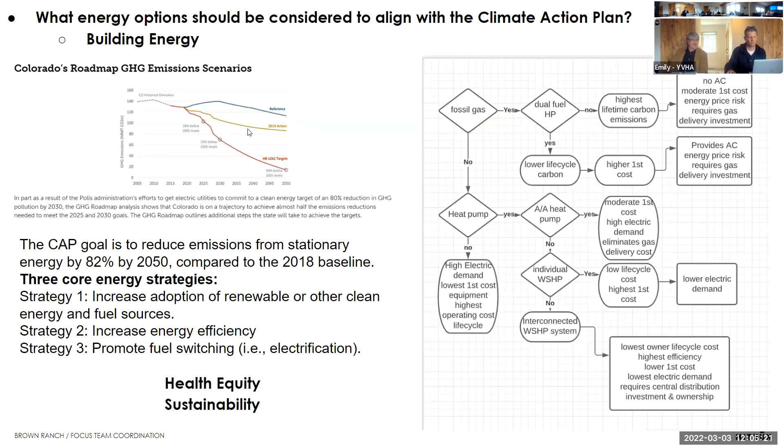Dylan Anderson with the Steamboat Today. I'm Jason Beasley with the Housing Authority. I'm Brooks Kellogg, also an interested resident, I've been building here since 1972. Can our online folks unmute and just say a quick hello? Mike Morty with Routt County Road and Bridge. Thanks, John Mike. Snyder with Steamboat Springs Public Works. John Spezia, citizen at large or small. Welcome, John. Jai Carroll here with City of Steamboat Springs Public Works. Tim Sullivan with Yampa Valley Sustainability Council.

Virginia, do you want to just say a quick hello and who you are, introduce yourself? Virginia Herman with YVEA. Hi.

One bit of housekeeping before we get to Paul. We all saw that article in the paper the other day, and I had dinner with a friend last night who asked what's going on with the comment that YVEA can only provide 15 more houses to people in the county. I said that's not quite the whole story, and we're working on cleaning it up. I want to give Virginia a minute to clear that up. All of these teams and our community outreach regarding these sessions want to make sure we're as accurate as we can be, and not affect businesses and other people in a negative way. We're all trying to give the best information we can, but sometimes we make assumptions and put the cart ahead of the horse. We want to minimize impacts on our community members or businesses. So I want to give Virginia a minute before Paul gets going, because none of what we say about water or storm drainage happens without everything else happening too. Virginia, if you want a second.

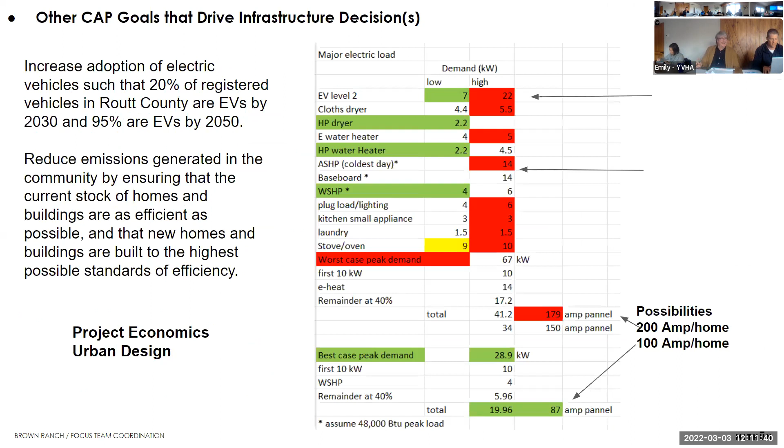That was a great tee-up question: what energy options should be considered for Brown Ranch? Again, as I did last week, here's a little decision tree to help keep it in focus. You really have two choices: 100% grid-tied, which we'll call the business-as-usual or traditional system.

That's where we heard last week how much load can be served from the new substation or an upgrade to the existing substation at the airport. If the load gets too big for that existing substation, there'll be another cost point to go further back in the system to where that substation gets its electricity from Xcel. So that was pretty much what we heard last time.

What we'll need to fine tune is—YVEA, and I used to be a utility planner—they can't size a system until we tell them what the load is. Once we dial in the load, they can sharpen their pencil and say, okay, we don't need to upgrade past the substation, or we do, and here's how much it'll cost to get from the substation to Brown Ranch.

And then the last piece is, once you get to Brown Ranch with the primary service, you still have to get power to each building, so there's a cost point for that infrastructure. We're way too early in the conversation for that, but I think we should frame our discussion on how much power we're going to use, how much it's going to cost to get there with or without the need to upgrade the feeder to this new substation, and then what it's going to cost to distribute that power once the urban group has given their densities, linear footages, and KWs per home.

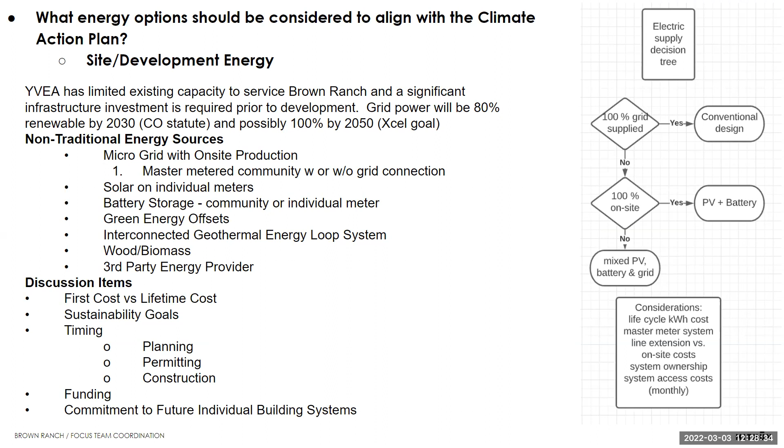So what Paul and Ryan have been talking about is kind of laying the framework for us to explore a couple different options to say what is the best scenario for us, short-term, long-term, bringing in these factors we talk about, and wanting to make sure that we fully explore both of these options to see what's best for the affordability of the community long-term and resiliency of the community long-term.

So there's probably not an easy binary answer, right? Like we get down to the end of this, it's gonna be like, you're right, this is the solution, we know it. I think it's going to take iterations of us exploring this, figuring out costs.

And so that's what all of these teams are driving for, getting us to a point where we understand what different options we need to start weighing on, as opposed to starting out with everything on the table. We now understand that we have maybe 2 or 3 options related to producing energy for this site, and now we can spend time really digging into that.

Well, just to step back to last week, and correct me if I missed something, Virginia, but the upgrade to the airport substation gets you to about 40 megawatts. Above that, then we have to go back to the connection with Xcel, which is an additional cost.

So I think one of the reasons the hybrid approach is still on the table is that we might try to stretch that 40 megawatts out as far as possible. Can some of these other things we're talking about help us? And the piece we're missing right now is the demand, right?

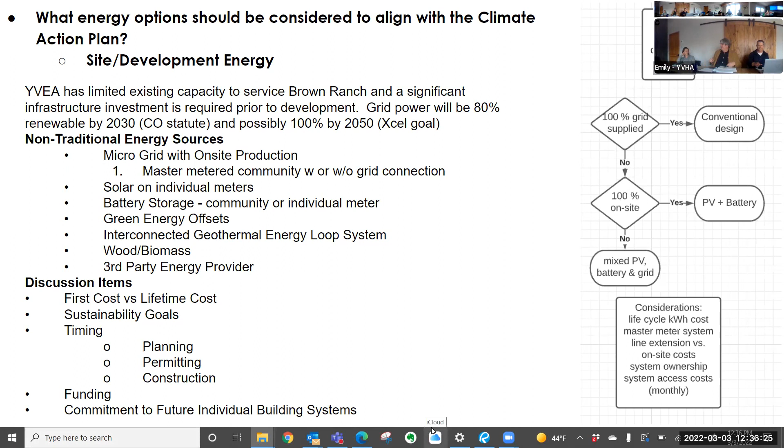So let's go from the technical to the fun. The other thing I was asked to do for this presentation, if you want to flip a slide on me. So there we go. So what precedent projects could be considered as a model for Brown Ranch?

This is Whisper Valley, Texas. Slightly different climate, not quite as cold, but definitely hotter. So just kind of flip the demand. They have to have a lot of air conditioning load, we have to have a lot of heating load.

This is a planned 7,500 units, it's under construction and units have been occupied now. 7,500 single family, multifamily housings in a planned community. It's a developer-based community, so it's not like this where a housing authority is putting it in.

They did go with what they call the geogrid, so those homes and commercial office spaces are all connected with a common water loop. And they're figuring 70% reduction in energy consumption by doing that from what they would have had with a traditional heat pump system for heating and air conditioning.

And those systems actually are what we call triple function units. So the heat pump provides space heating, space cooling, and domestic hot water. And then all of that goes into a common loop.

They went with all Energy Star appliances. They've given people the option to put solar on their individual roofs, so they're what we call solar ready, where the conduits are in place, the developer's not putting solar on the roofs. They call it an energy monitoring system, so folks can see where their energy use is going and maybe take active measures. But I would say for our purposes, that could become an energy management system.

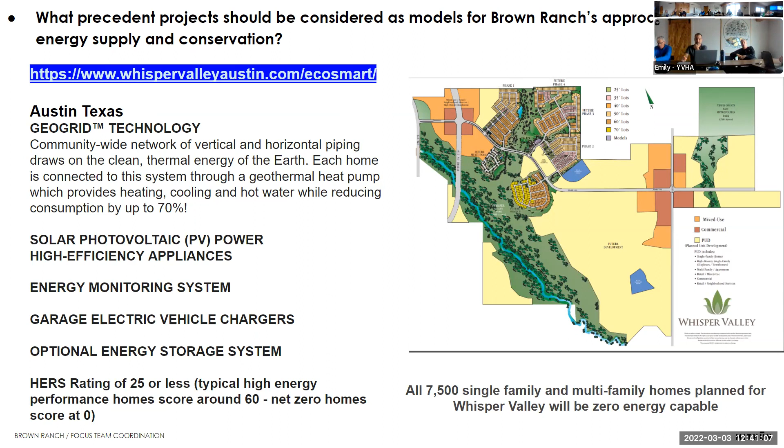When we were debating the various sources for putting up the tower and the generation, we made it such that if anything ever went wrong in a lifetime, the company would replace it—a good thing, because we lost the generator and they had to come in and replace it. But basically it saved the campus $500,000 a year in energy costs, and it went completely self-contained on their total campus energy without doing anything else but just putting in 2 wind farms.

We don't get enough wind here. No, we don't. So I'm not sure it's worth looking into that here.

If you're going to do an interconnected thermal system, there's what we call joint trenching opportunities, where you dig one trench and put 2 services in, so you only have to pay the excavating cost once, and you can leverage that first cost between multiple services.

And then, as I mentioned earlier, we really need to be granular on what it costs to get power to Brown Ranch, and then what it costs to distribute power throughout Brown Ranch. So I break that into delivery versus the development distribution. And then, as we just mentioned, we still got a lot of work to do.

If we can't get to where we need to go, and where YVEA needs us to be, till we know the building types—both residential and commercial, because commercial is going to eat into that 40 megawatt load as well—that's why efficiency has become pretty important. Once you know you've got a cap, how can you come in under that cap? And then what's the timing?

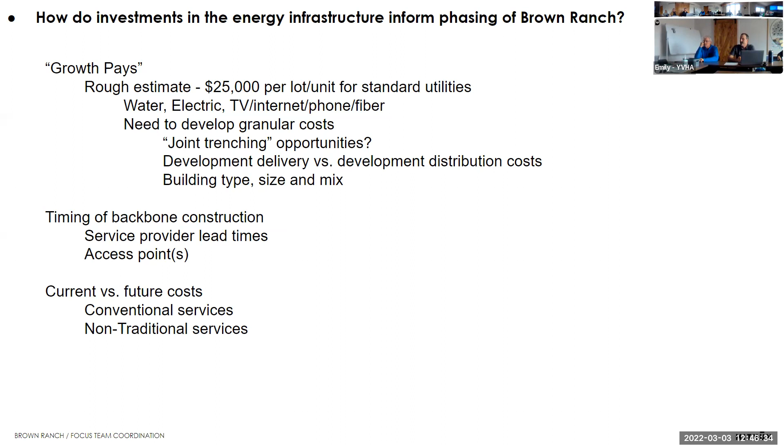Ryan, do you want to go into stormwater, please? Stormwater is a little bit more straightforward. It goes downhill, right? Yes, hopefully. Or into your basement. Or you're using a pump.

I think we can push some of the heavy lifting up to some of the other groups, especially the urban design group. That'll be nice while we focus on the review.

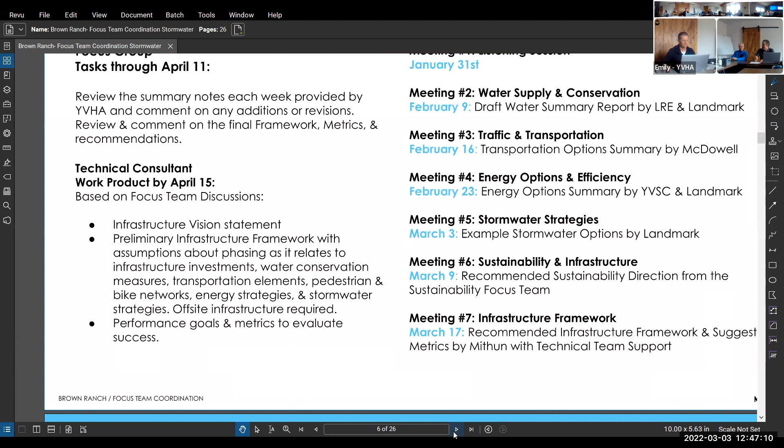Right, before you start, there's certain city regulations, we can't just go off and do our own thing here. You're going to have to follow some fairly strict guidelines. Is that accurate? Yep, so I'm assuming this parcel would be annexed into the city, and we'd have to conform to the city's regulations. But above and beyond that, there's also Colorado state law and Routt County regulations, which would require a lot of the same things the city would.

When you say state, are you talking water quality and water rights issues? More water quality and conveyance issues. Essentially the way the state law reads, you have the right without an easement to discharge stormwater onto a downstream property at the existing rate, the historic rate. So when you come in and pave a whole site, you can't just let all that water run off onto your neighbor's property. We'll get into that a little bit more.

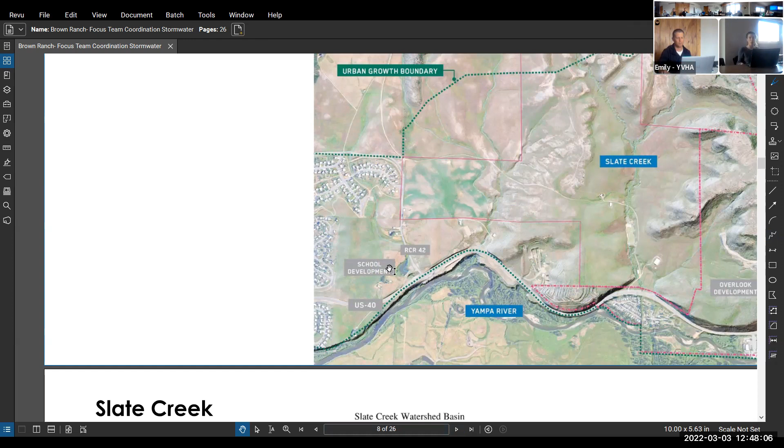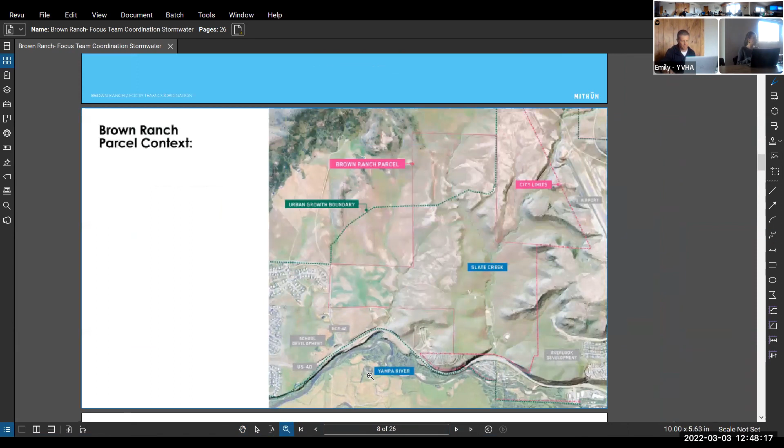So first, I'll try and run through these, we have about 40 minutes. Just to orient everyone, we're talking Brown Ranch here. Slate Creek is the major drainage way that runs through the spine of the site. There's a secondary drainage way on the west side that I'm not really going to talk too much about today, but everything I talk about for Slate Creek applies to that same basin.

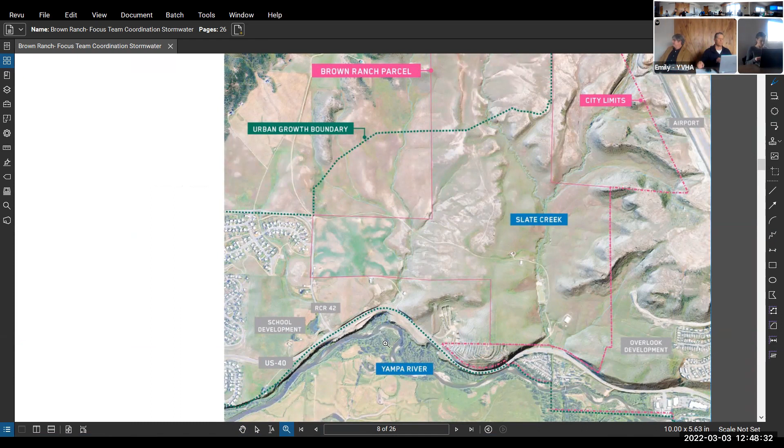It's about 3.36 square miles. It drains down through Brown Ranch. So when they looked at that, they calculated a 100-year flood flow of 155 cubic feet per second.

A 100-year flood flow is a flow that has a 1% chance of occurring in any given year. It's a little misleading the way the terminology works, but if you set up your tent or house out there for 100 years, you actually only have a 63% chance of seeing this flow. In any given year you have a 1% chance, and you could have it in multiple years - you could have a 100-year flow in 2 years throughout. The probability is highly unlikely, but possible.

So looking at that, what they determined as part of the Steamboat 700 project is largely that flow of 155 CFS was confined to the Slate Creek channel. There is some flooding down at the Highway 40 culvert that goes down between KOA and Sleepy Bear.

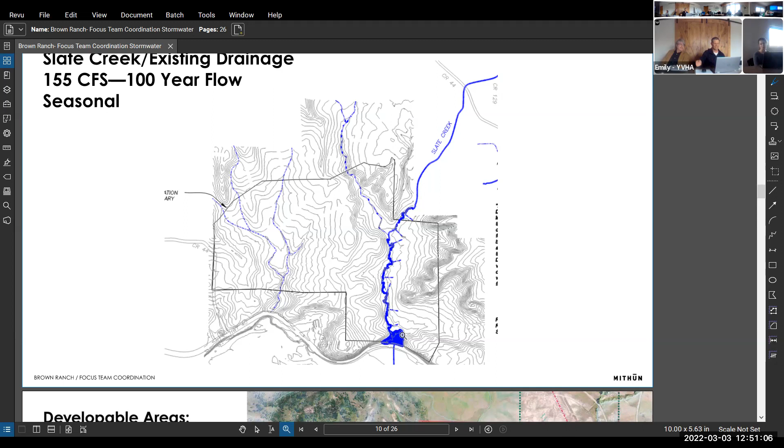Is there potential for the underpass for the core trail to include some sort of conduit? There isn't - I'll get to that in a minute. It's a good question.

So what happens? This is a slide from the urban design group. Right now the site is basically in 100% pervious condition. There's a few gravel roads out there, but for the most part, it's undeveloped.

The urban design group has started looking at how much of the site - 534 acres - the project could develop. They start to take out the portion that's outside the urban growth boundary, areas along the creek where the slopes are too steep, and they're left with 324 acres.

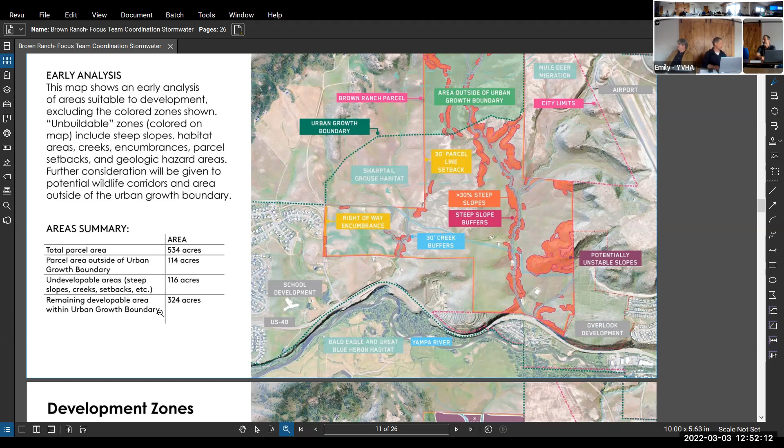Is that portion outside of the boundary truly - should it be taken out of the building calculations that we're making? That's one thing the urban design group's looking at. It seems like the border is just a random dot somewhere that it could be extended. But someone's looking at that, so that number could increase - that's just for this discussion.

And then they started to map out areas that could be developed. This is how you come up with 324 acres.

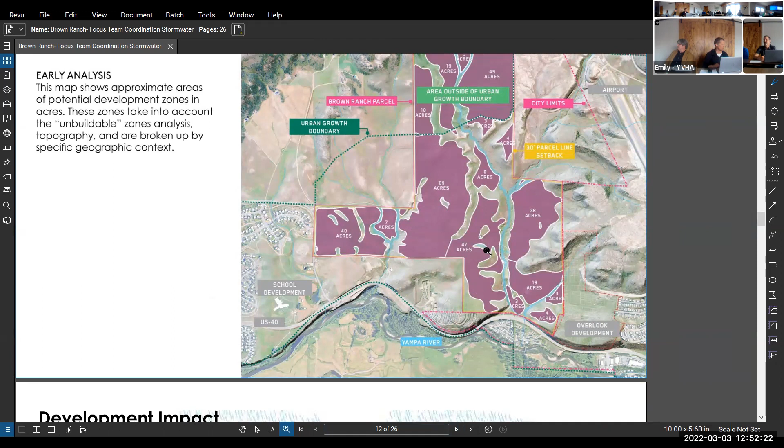So what happens when we go in and start developing all that? This slide is showing that in its natural state, about 5% of the water runs off and 95% soaks into the ground.

We go in, we start putting in roads, sidewalks, parking, buildings - all of a sudden we flip that equation. 95% starts to run off and 5% starts to infiltrate.

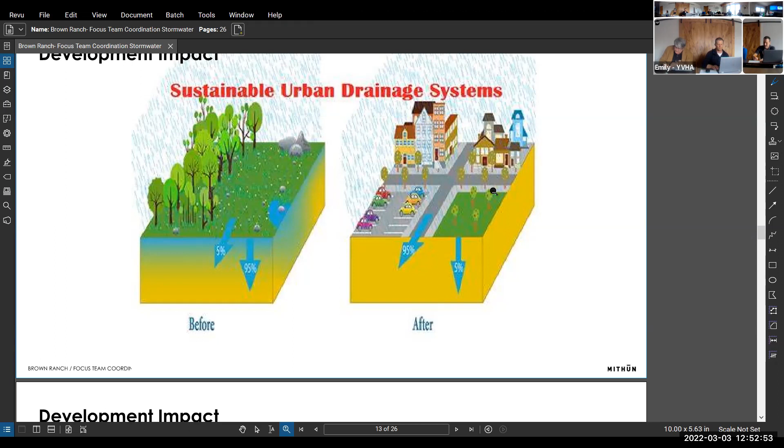This has a few different impacts. We increase the amount of runoff significantly, and we also decrease water quality as you start to develop, pave things, put buildings in. There's a lot of scoria right now as the best example - we spent all winter putting down scoria, and now it's all getting washed down into the road. So we have to deal with these impacts that development creates.

When we increase runoff, we have two choices. We can either increase conveyance capacity, meaning we put in more pipes, more inlets, enlarge channels, or we have to detain and limit flow to the existing release rate - that 155 CFS. That's a pond - it catches it, and then there's a controlled outlet that releases it at the historical rate.

And then for a decrease in water quality, we'll have to construct what are called permanent stormwater quality features. These are things that try to catch sediment, try to catch floatables like styrofoam - stuff that floats to the top, sediment goes to the bottom. And then there's also lots of chemicals in the runoff from our cars, fertilizer, ice melt, and the things we use in everyday life.

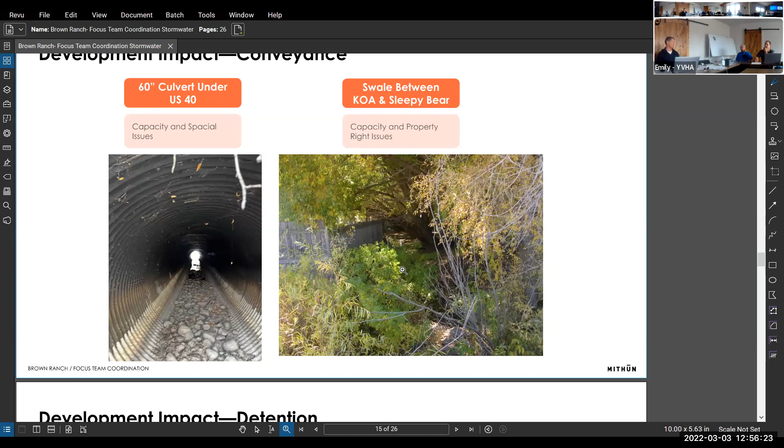So I think the Overlook project, Steamboat 700, and Steamboat West neighborhoods all came to the conclusion that conveyance is not the answer to handling the increasing runoff. And they start to look at detention.

So just running some quick calculations, if we assume that 330 acres are developed and we take the imperviousness from 5% to 75%, we start to look at some required detention volumes.

City code requires you to look at what's called the minor storm, so a 5-year storm, or a storm that has a 20% chance of happening, and then a 100-year storm. The detention required to handle that increase in runoff is 17 acre-feet for the minor storm, or 30 acre-feet for a 100-year storm. An acre-foot is...

...a body of water that's 1 acre in area and 1 foot deep. A football field is about an acre, so a football field a foot deep is probably a good visual of the volume of an acre.

You can see these cubic feet numbers are pretty large and hard to visualize, so that's why engineers tend to talk in acre-feet. It's important to be clear, it's not acres, it's a volume of water detained within a pond of so many acres at a certain depth. So if the water was only 1 foot deep, it would have to be 30 acres. If you had it 5 feet deep, then it would only be 6 acres.

The city of Steamboat Springs does require regional detention for new subdivisions, and the thought behind that is they want to try and minimize the number of detention ponds.

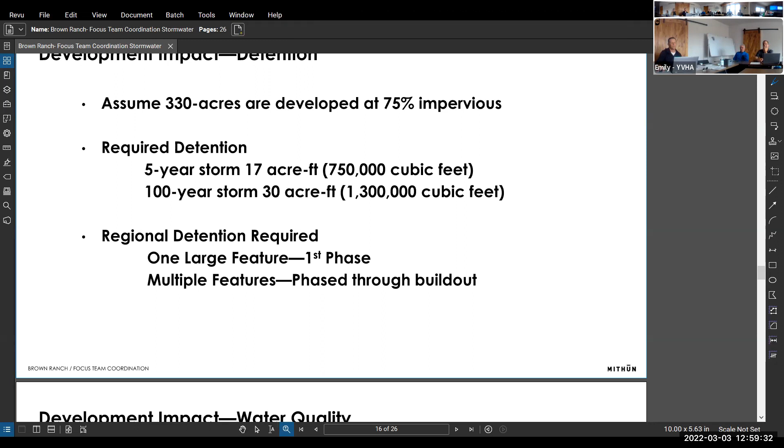Looking at water quality capture volume. So that's as we start to figure out how much water we would need to treat to collect and remove those pollutants. Some quick calculations say that has to be 9 acre feet, and that can be combined with detention. The city of Steamboat does allow you to do that. Some cities don't allow it and require it to be separate.

Ryan, what's the size of the ponds on this site? Good question, there's a stock pond out there. Yeah, that's a great question. Is that a 9 acre foot pond? Is it 8 acre, 12? I don't know, it's pretty big. It is, yeah. It's probably an acre at least.

So now I'm going to start to talk about some stormwater solutions. Number one solution: whatever you can do to reduce the runoff, just minimize the amount of water we have to deal with. The less impervious the site, the more pervious it is, the easier it's going to be for us to deal with all that.

Ryan, you can't actually stop it from raining. What you're talking about is reducing the rate of runoff, the total volume never changes. Well, the volume would change in these scenarios, for instance, if as part of the project people are going to walk more, we can get rid of half the cars, or cut the parking lot size in half. So you've increased pervious area, decreased impervious. More parks, less parking lots.

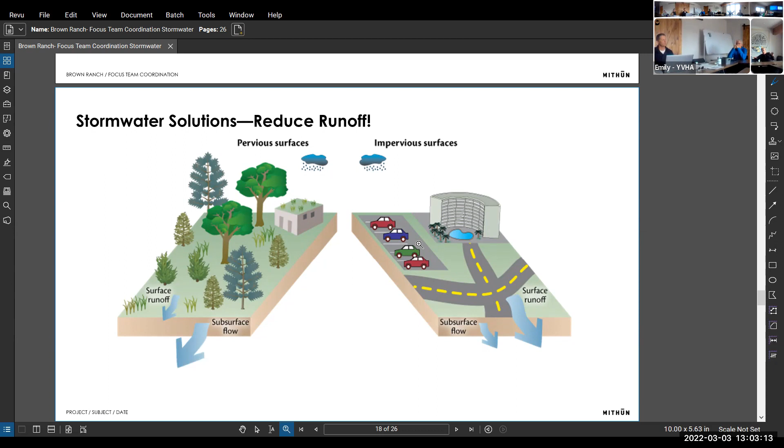If we created a larger wetlands, would that just subtract from your detention requirement? That's a good question, let me get back to that one. Okay.

The trade-off is that curb and gutter costs more because you have to put in concrete and storm sewer, but it's more compact and allows for denser development, which is why you see it downtown. The swale open channel is less compact but costs less, which is why you tend to see it more in rural and residential areas. But it decreases your developable area because you have to dedicate acres to the swales.

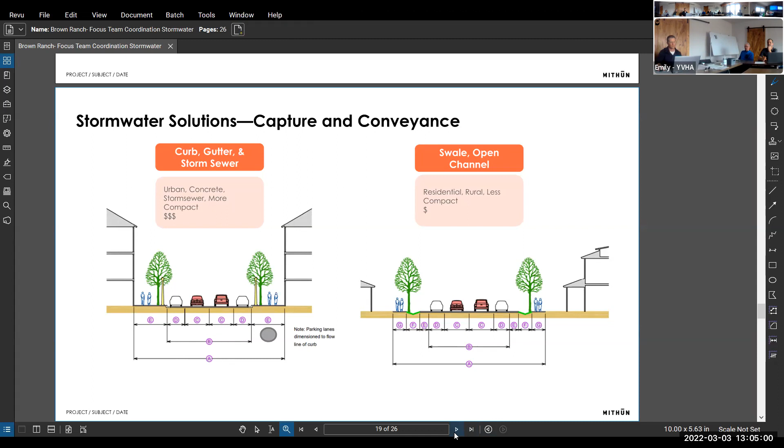As we start to talk about detention and then water quality, they're called BMPs, or best management practices. There's a nonprofit organization in Denver, Mile High Flood Control District, that has developed a toolkit to help people address these impacts. They have these different tools, and this is pretty much the Bible for drainage in Colorado.

There's retention ponds, constructed wetlands ponds, and wetlands channels, which is what you were talking about. The major challenge we would have with those is they require permanent water sources, and Slate Creek is not a permanent water source. It's seasonal, and there are times of the year when it dries out. A retention pond means it has water in it all the time, and wetlands can be extremely hard to establish and maintain. It may in fact be impossible.

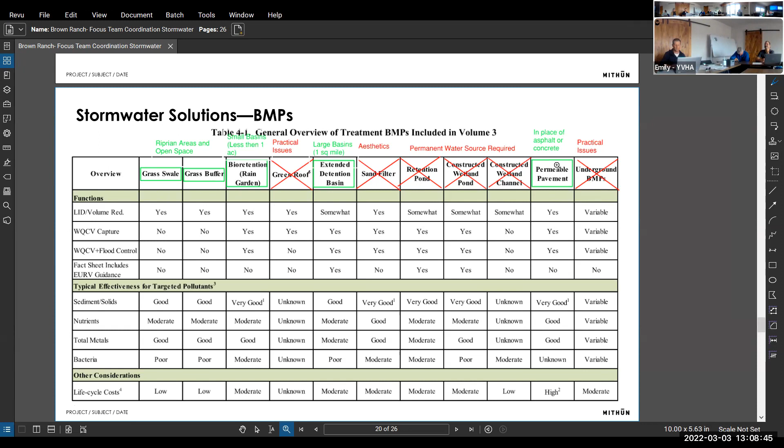A grass swale is really just a drainage swale, like I showed you in that section, but it's lined with vegetation. Vegetation removes sediment and takes up some of the pollutants. Same with the grass buffer. The difference between a grass swale and a grass buffer is a grass swale collects water and conveys it in a channelized form, while a grass buffer has just sheet flow across it, not channelized. A lot of times they're used in combination.

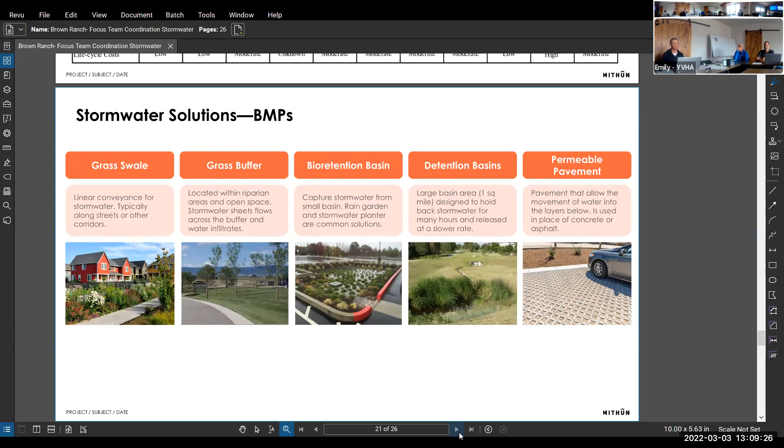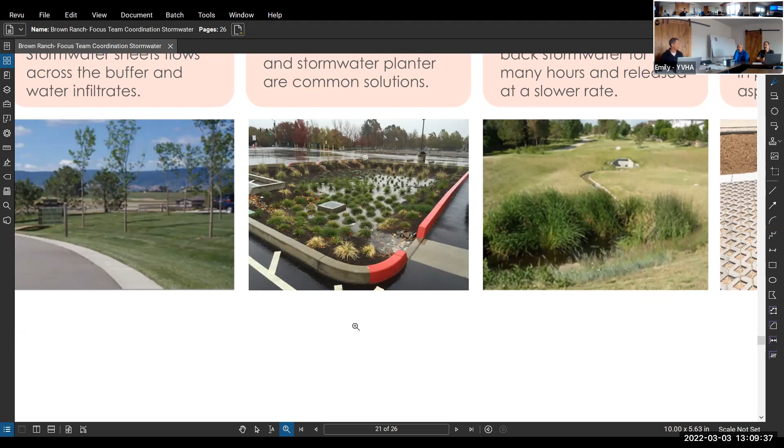A rain garden is just a landscaped area that's designed to flood during rainstorms. It's more like a depression than an actual pond.

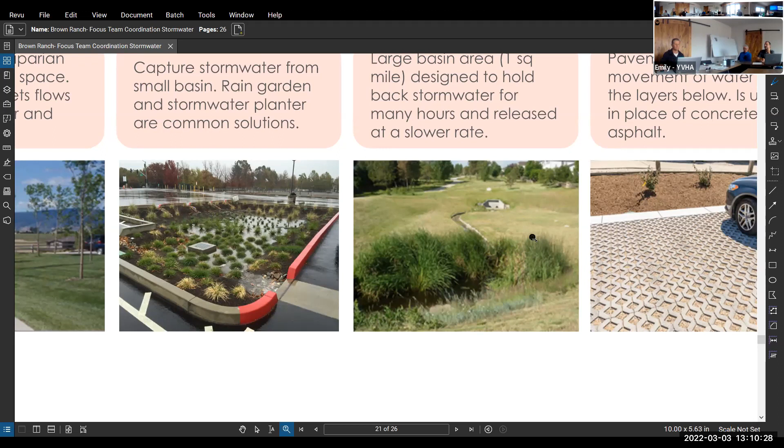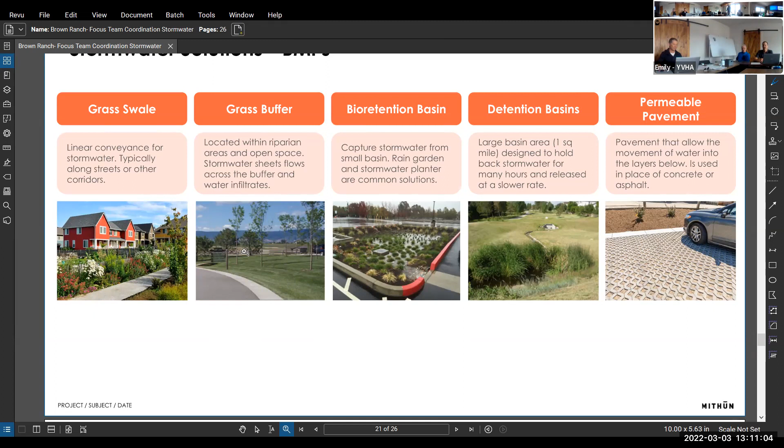So with our snow removal challenges, how do these integrate into the issues associated with snow removal and storage? Well, they're all great for treatment, but the snow removal does increase the maintenance we have. That's really an effect of the scoria and debris and everything that gets plowed into them over the course of the winter. When the snow melts, think about the pile at Old Town Hot Springs—when that melts, they have to go out there and clean it all up in the spring. It's going to be the same with all these. At the end of the spring, this grass buffer here has to be raked and all that scoria and debris has to be removed.

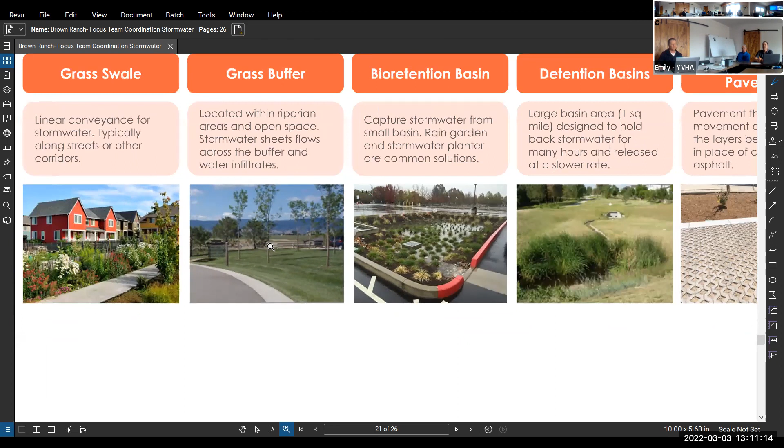Permeable pavement is just pavement, like Brooks was talking about, that allows water to flow through it. In this example here, you can see these concrete blocks, they're hollow, and there's just sand in the middle.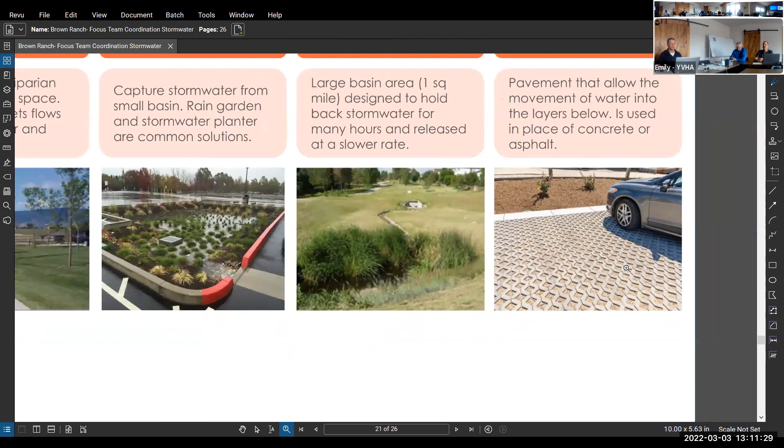It's a great tool, it does tend to be more expensive. Does the city allow it? The city does not allow it in the right of way, but it could be something used on private property.

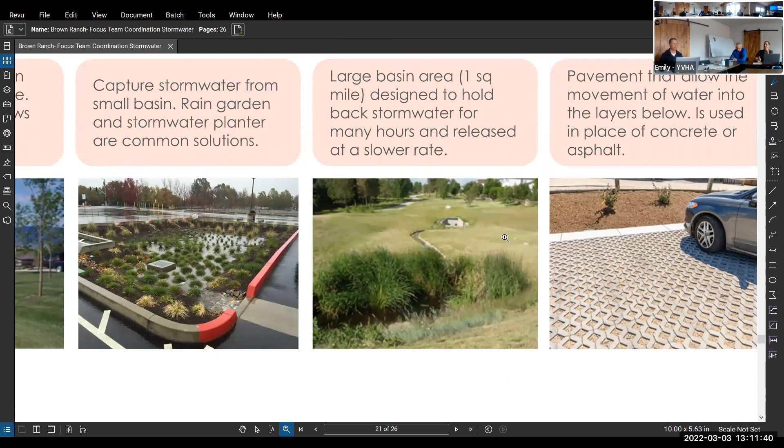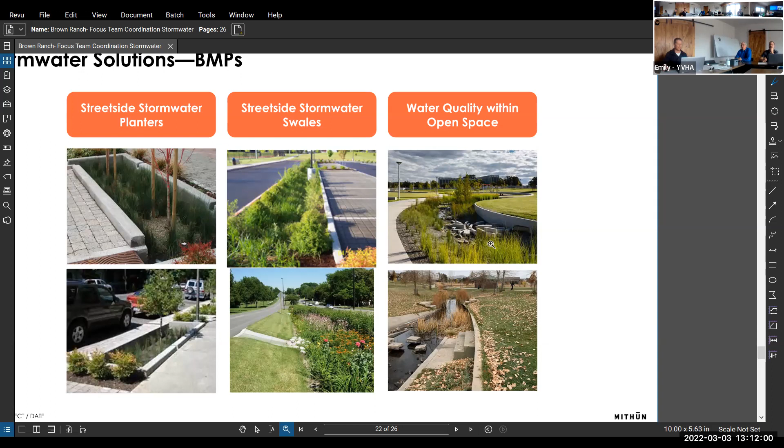Here's some more examples of these just implemented. These are rain gardens, included on the sides of streets. Here's some stormwater swales, and examples of open space where detention's been incorporated. In these two examples, these would all flood in a storm event, this would be underwater.

So this is a graphic from Link, from when they were master planning RiNo.

On the right, this is the conventional water quality low impact design feature where you have individual lots carved up, and developers come in piece by piece to construct these ponds. As part of the RiNo plan, they worked with the city of Denver to incorporate all that into a linear fashion along the right of way. This allowed them to increase density by 25% and reduce construction costs by 25%. They were able to do this because they were master planning this whole area at once and got the city to buy into their solution.

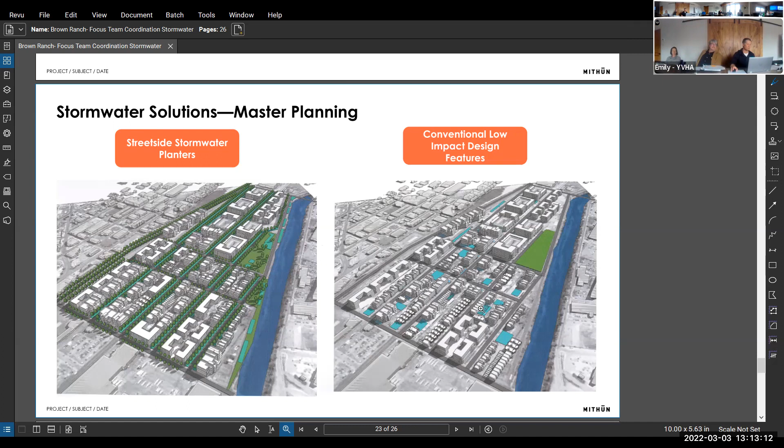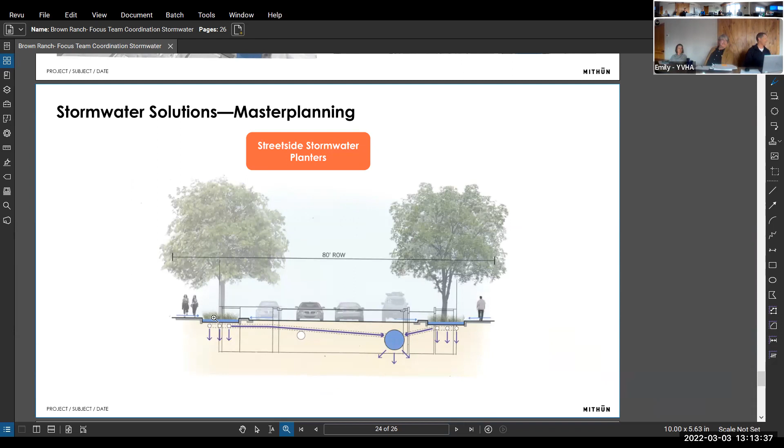This is a zoomed in detail of what they proposed. They had the traditional curb and gutter and then the sidewalk, but in between, think of them as really long rain gardens or detention basins that provide both water quality and detention. How wide would that typically be? They're showing an 80-foot right of way here, with these at about 8 to 10 feet, and the sidewalk behind it at 6 feet. A traditional right of way might be 60 feet. Steamboat's anywhere from 68 to 80.

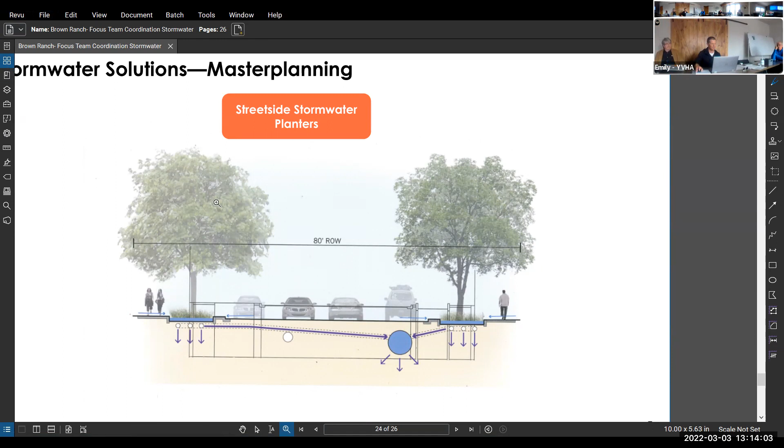So if we flip back to this graphic, what they did is take this area that was traditionally like what you see outside, with bricks, pavers, and tree grates. They basically took that area out, depressed it, and made it a detention water quality feature, but still kept it landscaped, so it still achieves that same urban design feel while creating detention on a very long linear basis.

So here they're showing how they took all this wasted space along the sidewalks, not used for storm drainage, and took these ponds, instead of having separate ponds, and put them here in a linear fashion. So linear is more efficient. Well, that's just one example of how they were able to do something on a master plan level that you could not do on an individual basis.

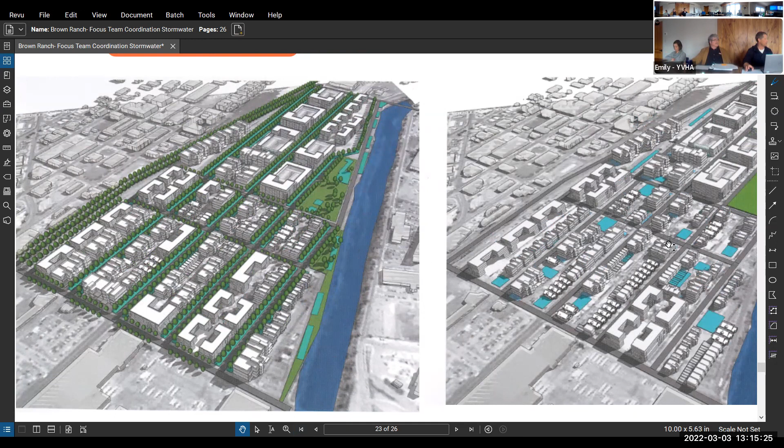I think the purpose is to increase land utilization for us. The more we can double or triple up uses within a space, so we have areas like open space corridors that can also serve as stormwater quality features, we don't have to have them all in their own separate space. They can double or triple up on the same acre. So now you can utilize that space where those ponds might have been for houses, and we've become more efficient.

And the efficiency you gain is not only on the stormwater side, because you're still constructing the same linear feet of road and water main, sewer main. But if you're able to serve 25% more units, the cost per unit for all that other infrastructure starts to go down. I can kind of see that on a grid. I don't know if we're gonna have a grid out there because of the slopes. What I was trying to show here is not necessarily the concept for Brown Ranch, but the efficiency that can be gained.

The real innovation with this project is to incorporate stormwater and think about it now, have the urban design group really focus on incorporating it into their plan, and try to take double credit for things, instead of addressing it down the road.

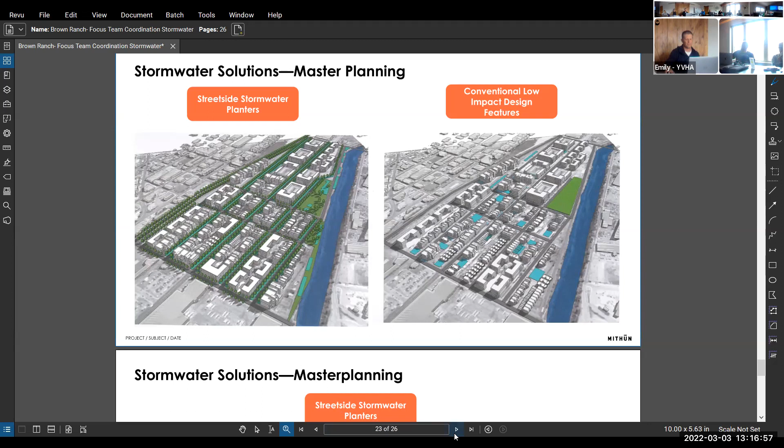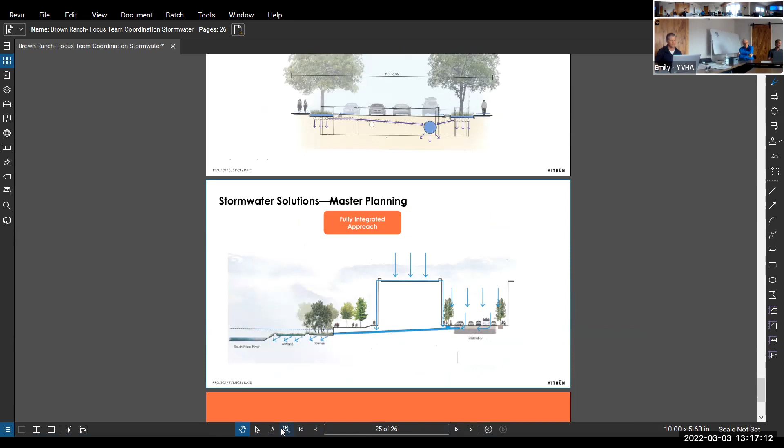And so hypothetically, in our situation, we're maximizing land use. You have some numbers around how much stormwater we're going to have. Do those two currently match up with our hypothetical, say 3,000 homes or units? Or do we need to find better efficiencies to get there? I don't know the answer yet, because maybe we could do any of those with the amount of land we have and still get the homes. I don't know if we're tight or not. That's kind of until we start to get the demand and start to bring everything together.

Okay, and this is just another example that's maybe a little bit more applicable to a fully integrated approach. So this is again down in Denver, but imagine this as Slate Creek here, where they have riparian area and wetland area that's providing water quality and treatment. They're doing infiltration and water quality here in the roadway to try and reduce the runoff. And then here's your 100-year flood elevation, maybe in some sort of detention basin that is also part of Slate Creek or the open space around Slate Creek.

Ryan, how much do we have to plan for some of these adjacent parcels that are within the urban growth area but not yet annexed or even planned? Is it our responsibility to do some estimates and make sure our channels are large enough to accommodate neighbors?

I'm sure they would appreciate if you did that, but we go back to that state law - you're only required to convey what their existing runoff is. So for instance, the Overlook subdivision, they're doing on-site detention to limit their runoff to historic rates that comes on Brown Ranch. So we have to account for it in the sense that we have to take into account the existing runoff from the adjacent properties, but we don't necessarily have to assume they're going to be developed to 75%. As long as they release at that historic rate, we can accommodate it. Which they're required to, but not always.

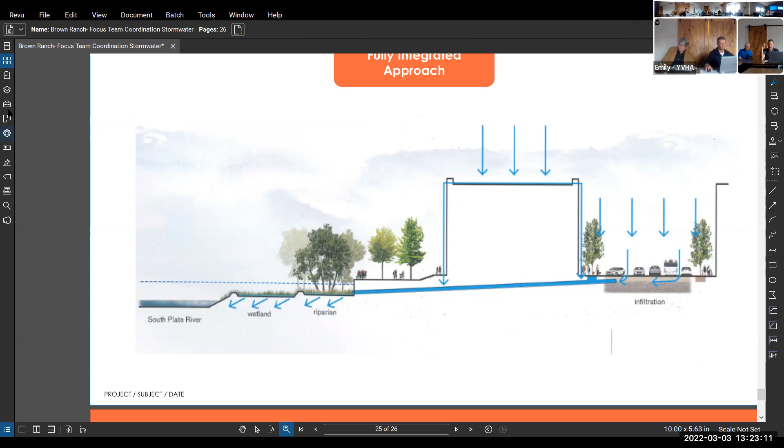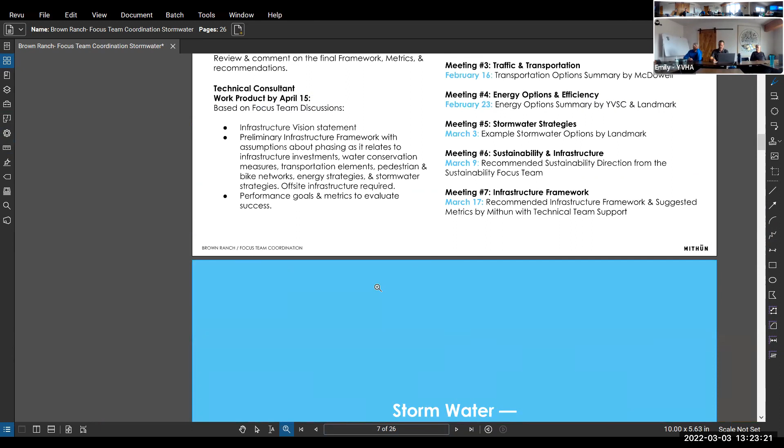I want to give everybody an update on the next meetings. The next meeting will be on the 17th, at noon, in combination with the sustainability focus team, in this location. Then on the 23rd of March, it will be a change from what others may have previously seen. It will be at 5:30 p.m. in a combo setting with the urban design group. Jason, can you tell me that location? Yeah, that'll be at the community center, in the West Room. So we have the 17th at noon with sustainability, a combo meeting, and the 23rd at 5:30 in a combo with urban design at the community center.

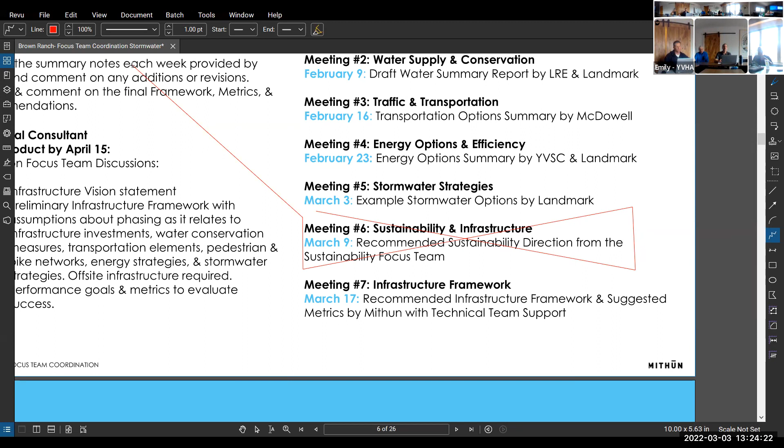These teams are starting to weave together because you just can't get away from the fact that they're interrelated. I think we've done a very good job focusing on our own particular topics, but we've gotten to the point where we need to start integrating these conversations, because as Tim mentioned, they're having the same conversation about stormwater, so let's have it all together. The same is true with economics and demand, stewardship, energy and infrastructure, sustainability. All of those things are starting to weave together, which is kind of how we saw it going eventually. You can't remain in silos forever.

Jason, are you going to give us a document that shows these interrelated activities, so we don't have to remember when we show up at the meeting that the stormwater thing spills over into this? Do you have a good handle on what the issues are and whose realm they exist in? Yeah, we've actually got some framework stuff that our prime consultant has been working on that would help identify who's the lead and who's the support in these particular areas, knowing that they're all sort of integrated.

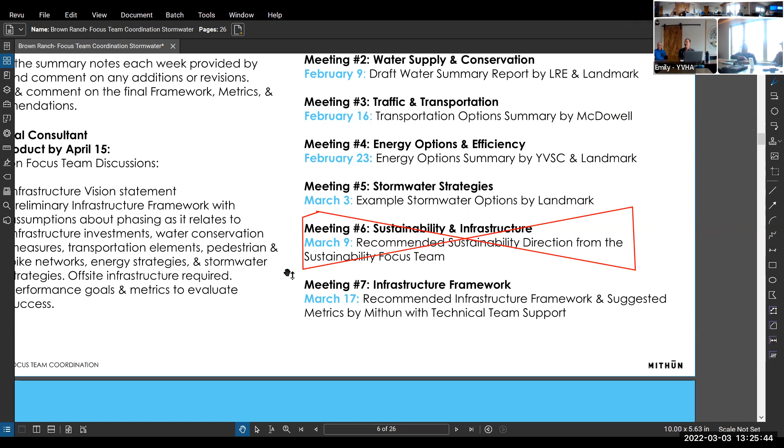I agree with Jason about bringing these teams together, because I think what we can start to do now is, as these teams come together, we today knocked out a few things, saying okay, this won't work. When we bring the teams together, they can also start to say this isn't going to work for us. So we're headed to the area where we're going to identify where the synergies exist. We just talked about urban design and stormwater management maybe working really well together. We're also going to identify areas where we've got conflict we have to figure out. As we start integrating, we'll see that these things are working really well, let's continue down that road. But we've got to maybe pop it up to the steering committee to deal with some of these things that don't have that synergistic relationship, that have more of a competing relationship.

Maybe before we depart, we should ask Public Works. John, you've suffered through this, you always have some insight. Do you have anything to share with us that might help us in this process?

Sure, well I think Ryan's presentation was very good. He's worked a lot in the city and he's worked at other jurisdictions as well, so I would just encourage everybody to follow Ryan's lead. He's got a good handle on this, and I agree with everything he said today. Thanks John, glowing endorsement.